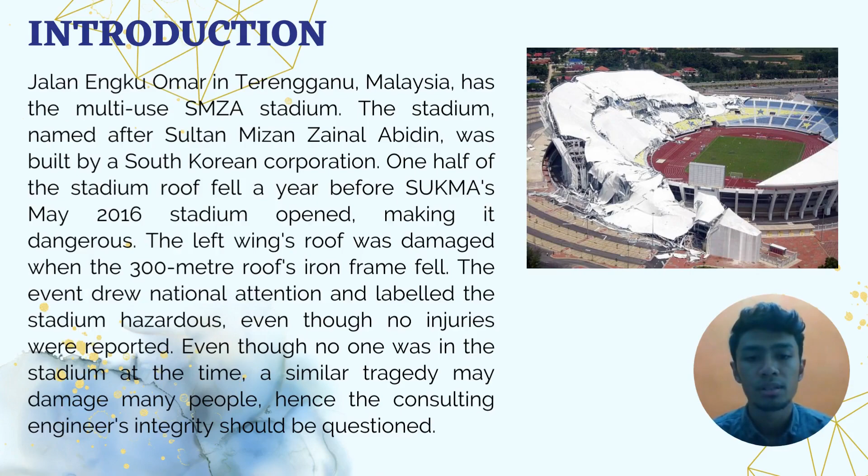Ethical issues that are responsible for the building failure are poor management, engineering and design flaws, failure to follow building codes, lack of proper inspections, and honesty issues.

Poor management includes ignoring safety and risk evaluations. Management must ensure that the structure meets safety standards and can endure adverse weather and structural loads. Poor management may concentrate on cost-cutting over stadium safety and quality. Financial constraints allow shortcuts in material quality, construction processes, and quality monitoring.

An absence of professional skills and poor management experience may result in the appointment of people who do not possess the essential skills or experience in stadium construction and maintenance. A lack of transparency and communication - ethical management necessitates open and honest communication with all key stakeholders. A lack of transparency on safety concerns, construction updates, or maintenance activities may be the result of poor management. If stakeholders are not educated about the potential hazard, they will not have the opportunity to make decisions based on accurate information or to voice concern over the stadium's level of safety.

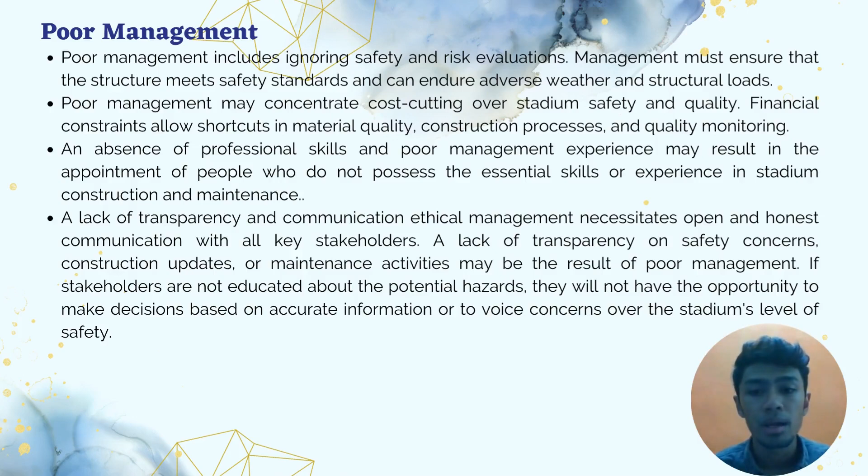Now I will proceed with the next ethical issue related to building failure, which is engineering and design flaw. Engineering and design flaws can have ethical implications as they can lead to harm to people and property. Some of the ethical issues that can arise from engineering and design flaw include the ethic of safety - engineers have a responsibility to design safe structures or systems. When they fail to do so, they may be putting people at risk.

Engineers have a responsibility to be transparent about the risks associated with their design. If they fail to do so, they may be misleading people about the safety of the structure or system. Next is the ethic of cost cutting, where engineers may be tempted to cut corners in order to save money. And the ethic of environmental impact - engineering and design flaws can have a negative impact on the environment. Engineers have a responsibility to design products and systems that are accessible to everyone. For example, a poorly designed bridge could make it difficult for people with disabilities to cross.

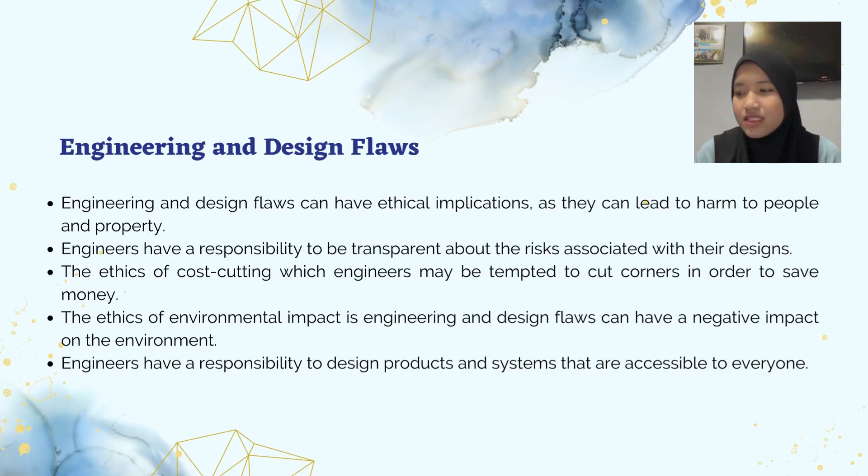Next is failure to follow building codes. Failure to follow building codes can have serious ethical implications. Building codes are designed to ensure the safety of people and property. Some of the ethical issues that can arise from failure to follow building code include the ethic of safety - engineers and builders have a responsibility to design and construct buildings that are safe.

Engineers and builders who blow the whistle on building code violations may face ethical dilemmas as they may have to choose between their professional responsibilities and their personal safety. When people are living or working in a building that has been constructed in a way that doesn't comply with building codes, they should be made aware of the risks involved.

Next is lack of proper inspection. The responsibility for conducting thorough inspection during construction lies with both the engineering team and local authorities. The collapse revealed that the stadium design flaws and construction deficiencies were not adequately identified during inspection. This raises ethical questions about the thoroughness and effectiveness of inspection and the duty to ensure the safety of the public.

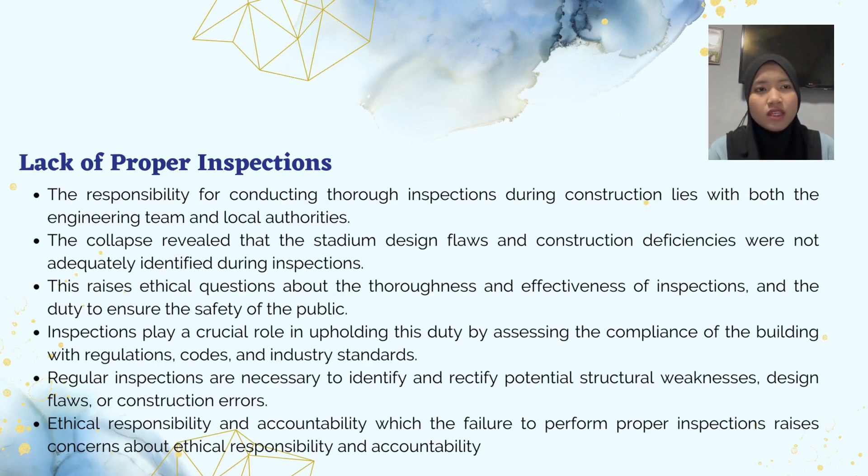One of the ethical issues in the case of the Sultan Mizan Zainal Abidin Stadium roof collapse is honesty. For example, there were reports of cracks in the roof and the welding used to connect the steel beams was defective. However, these warning signs were not reported to the authorities.

There may have been a deliberate attempt to conceal defects in the roof. For example, engineers who designed the roof may have known that it was not strong enough to support the weight of the stadium. In order to avoid delaying the project and incurring additional costs, they chose not to report to the authorities.

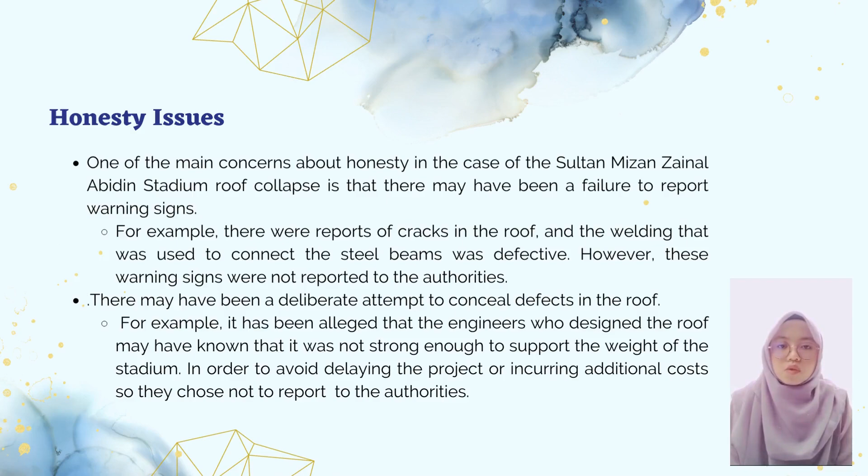Poor workmanship, ignoring warning signs, poor project management, weak supervision, and also poor education and training will describe how a lack of professionalism may lead to this failure.

First point of lack of professionalism that leads to collapse of the stadium roof is poor workmanship. The welding that was used to connect the steel beam was defective. This made the beam weaker and more likely to fail under load.

Next, the construction workers did not properly install the steel beam, resulting in gaps between the beams which allowed water to seep in and corrode the metal. Lastly, the construction workers did not properly secure the roof to the supporting structure, allowing the roof to move under load, which led to collapse.

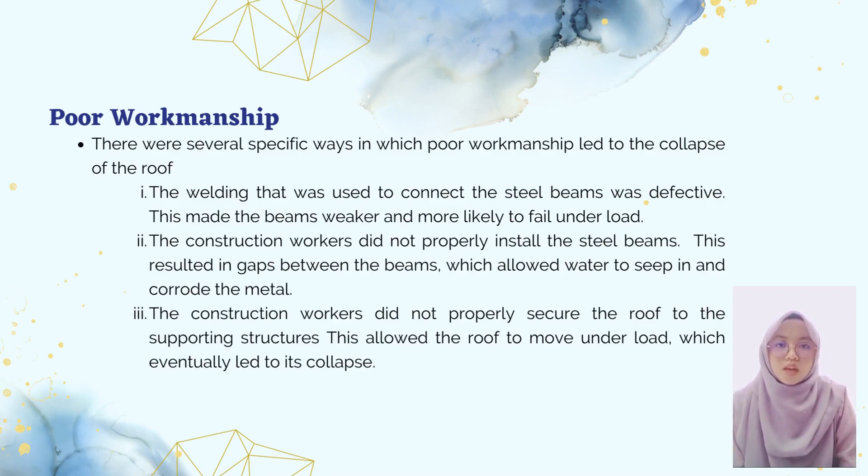Next, ignoring warning signs by the engineers and contractors involved in the project. For example, the roof had already begun to sag before it collapsed. In the case of the Sultan Mizan Zainal Abidin Stadium roof collapse, the ignoring of warning signs led to the death of 2 people and the injury of several others.

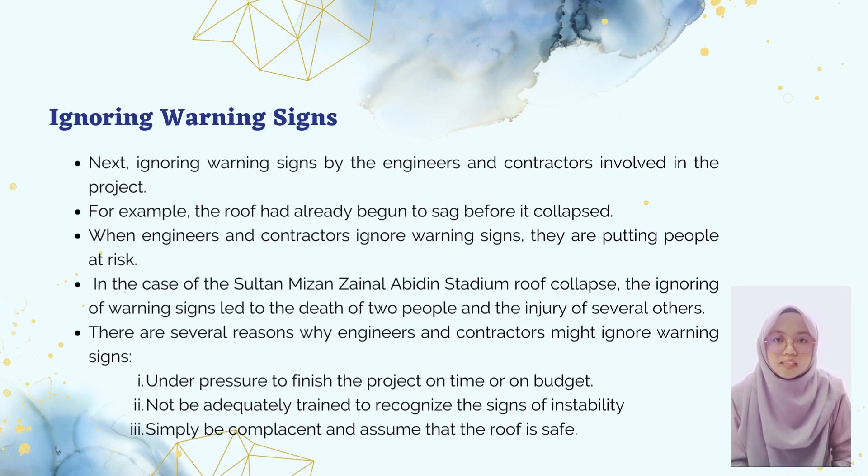These are several reasons why engineers and contractors might ignore warning signs: being under pressure to finish the project on time or on budget, not having adequate training to recognize signs of instability, and lastly, simply being complacent and assuming that the roof is safe.

In addition to the absence of quality control and safety measures, poor project management has been a contributor to this tragedy. SUKMA was scheduled to take place at that stadium, requiring them to work aggressively to complete the project within the deadline, while at the same time, they disregarded quality control and safety measures.

Similar to the appropriate utilization of building supplies for construction, it needs to be implemented in adherence with the standards and codes of practice, which is essential for maintenance. The adoption and implementation of a quality management system and also an environmental management system could provide a number of benefits for those professionals.

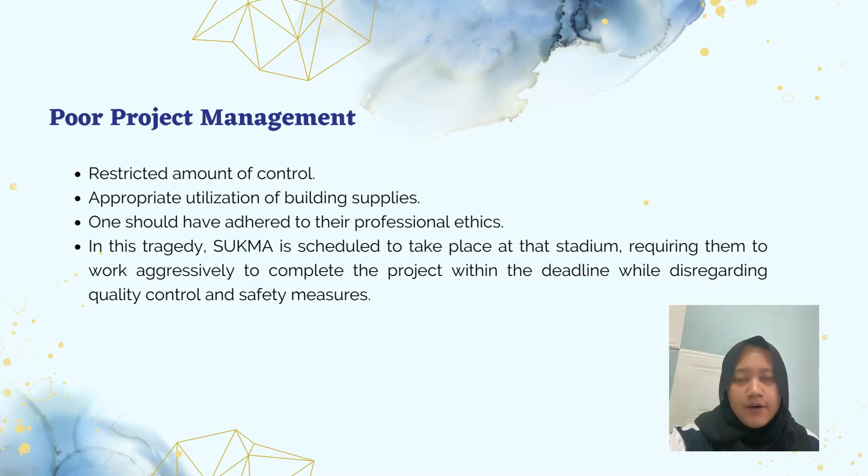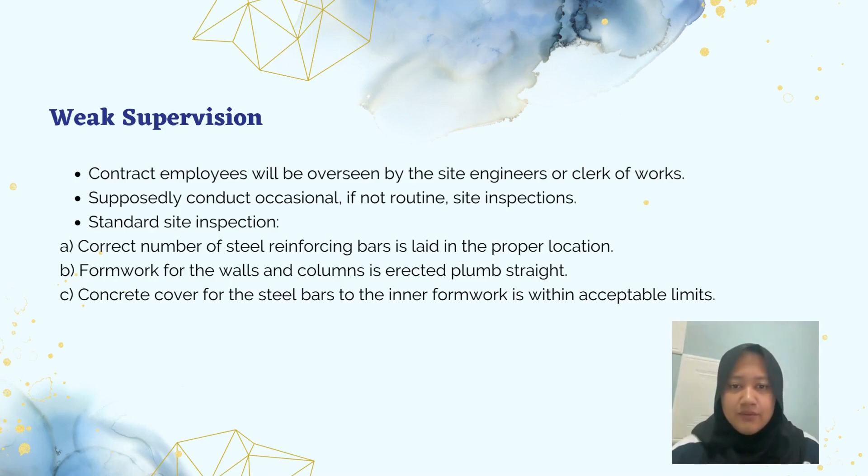Training and academic achievements constitute two of the main variables which influence the manner in which engineers perform as professionals in both design and construction. Some of them might lack specialization in site supervision.

The majority of graduating engineers are missing soft skills, which makes it challenging for them to communicate successfully. It gets harder as they need to communicate with international laborers from Bangladesh, Indonesia, and also Myanmar. They need to be provided with a strong foundation of work approach to deliver outstanding workmanship at sites.

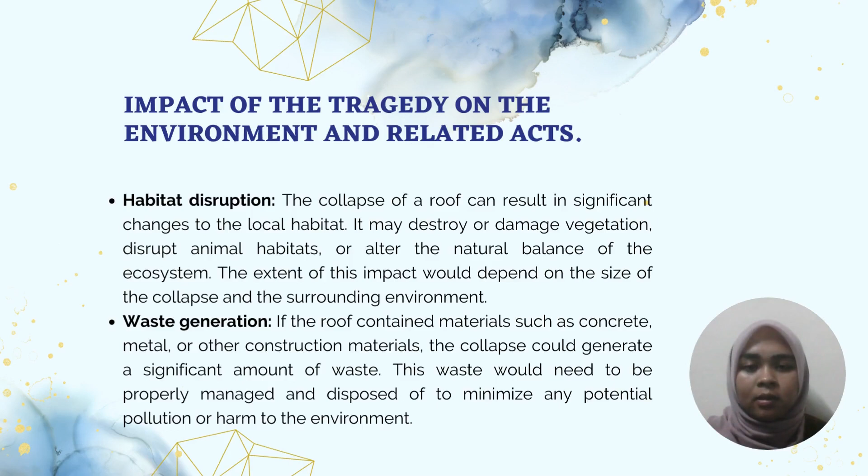Next is waste generation. If the roof contains materials such as concrete, metal, or other construction materials, the collapse could generate a significant amount of waste. This waste would need to be properly managed and disposed of to minimize any potential pollution or harm to the environment.

Next impact is soil and water contamination. If the collapsed roof contains hazardous material like asbestos or lead-based paint, there could be a risk of soil and water contamination. If these substances are released into the surrounding environment, they could pose a threat to nearby ecosystems, including plants, animals, and water sources.

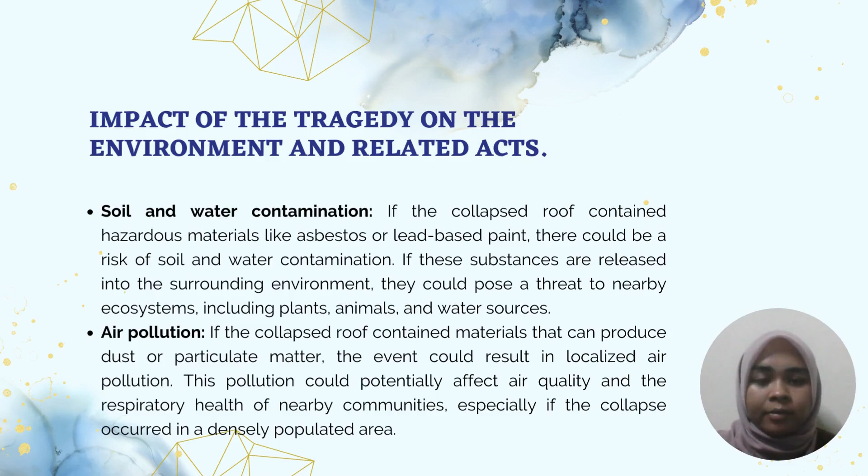The last one is air pollution. If the collapsed roof contains materials that can produce dust or particulate matter, the event could result in localized air pollution. This pollution could potentially affect air quality and the respiratory health of nearby communities, especially if the collapse occurs in a densely populated area.

There are related acts, which is investigation and accountability. Authorities likely conducted a thorough investigation to determine the causes of the collapse. Legal actions might have been taken to hold responsible parties accountable for potential negligence or violations of building regulations.

Next is building safety inspection. The incident likely prompted increased scrutiny and more frequent inspection of existing buildings across the country to ensure their structural safety. Building owners and relevant authorities might have been required to conduct regular inspection and maintenance to prevent potential collapse.

And the last one is awareness and public education. The Stadium Sultan Mizan Zainal Abidin collapse may have raised awareness among the public, building owners, and professionals in the construction industry regarding the importance of building safety. Public education campaigns and initiatives may have been launched to promote knowledge about building regulations, safety measures, and reporting mechanisms for potential risks.

Conclusion. Because it requires contribution from the numerous stakeholders involved in all elements of the job, from planning and design all the way down to the tedious work on site coupled with site monitoring, the efficiency of excellent engineering design is not easily quantified. This is because all of these aspects of the project are interconnected.